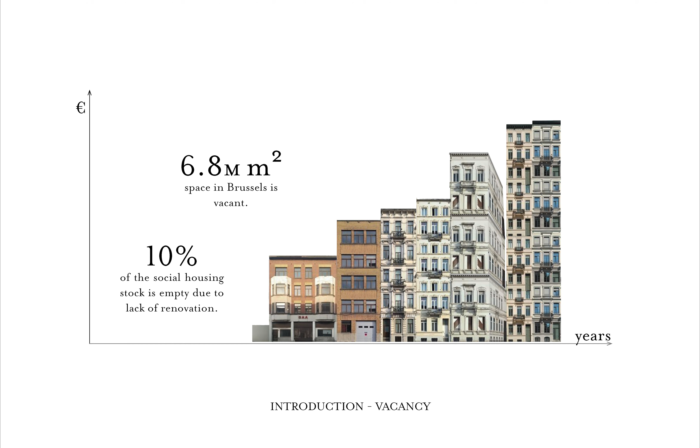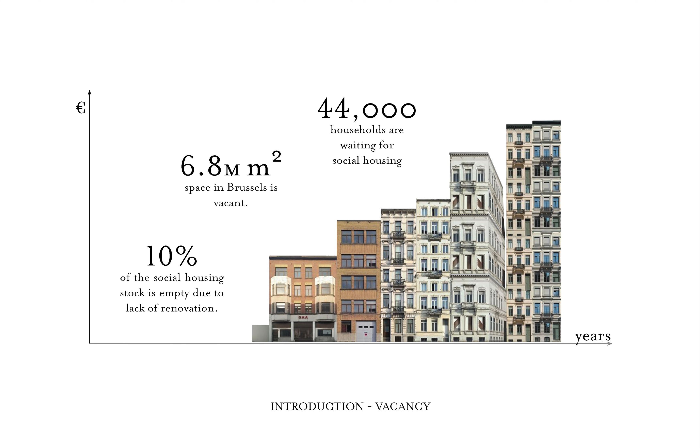Rising rental prices in our contemporary cities make it harder and harder to find rentable place at an affordable price. Controversially, the reason why space is becoming increasingly scarce is not due to the lack of space, but the inaccessibility to it. In Brussels, around 15 to 30,000 of the existing housing units are simply empty because of property speculation.

Vacancy accelerates the decay of the building and increases the feeling of insecurity within its neighborhood. Furthermore, there is a higher chance of vandalism and crime, and eventually it makes our city centers deserted. A temporarily unused property is also a problem for its owner because of the management costs and the vacancy tax.

On the other hand, empty properties are urban resources that offer temporary platforms for alternative usage, triggering entrepreneurship, creativity, allowing experimentation, and is also beneficial for the owner.

To figure out the future use and explore the possibilities that underutilized areas offer, city planners facilitate access to these spaces for the citizens living in the neighborhood, to empower and enable everyone to participate in the construction of the city. To help citizens manage the negotiation process with the owner, non-profit organizations started to emerge.

Such an organization is, for instance, Communa, based in Brussels. Their main goal is to heal the urban scars by temporarily occupying and reconditioning vacant places.

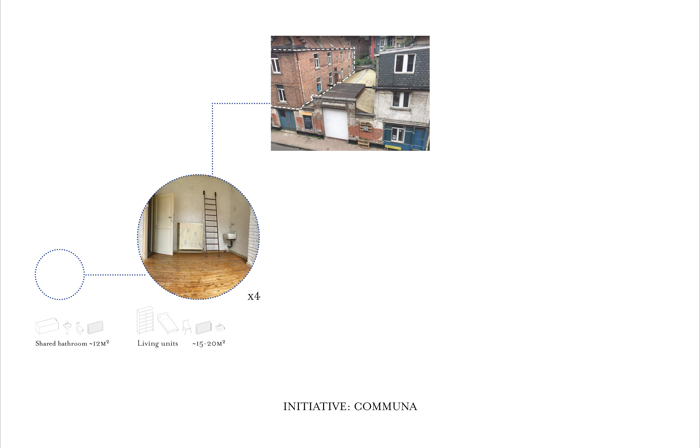This is Lesser, a recently occupied building run by Communa. It contains 4 living units to accommodate vulnerable people, co-working spaces for artists and non-profit social organizations, and a public venue with a community kitchen and bar based on solidarity economy. This is the most important place, which gives home to neighborhood activities, workshops, solidarity and second-hand markets, and cultural activities.

The recovery of the empty places happens as follows. Upon choosing the next possible building that seems appropriate for such an intervention, Communa contacts the owner of the property and convinces them about the benefits of temporary occupation and to let citizens use the property while it remains empty.

They then sign an occupancy contract and Communa co-creates the plans together with the future users. Afterwards, they refurbish the building to meet the minimal demands with the help of volunteers and the committed citizens of the neighborhood, and occupy and maintain the building for the agreed period, which could be 2 to 5 years.

As an organization mainly consisting of young lawyers and social workers, my role and contribution to their operation was a central question for me from the beginning. Throughout our discussions, it became clear that the biggest challenge they face is connected to the notion of constant relocation, because temporariness is not yet fully incorporated into their construction mode.

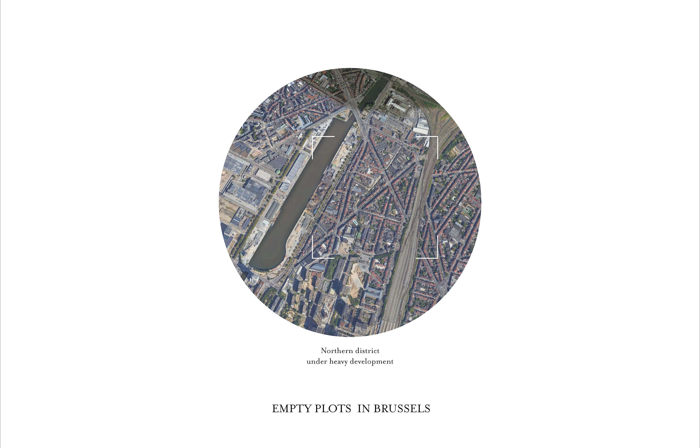Vacancy is an issue affecting all cities. However, I examined an extreme case in the Northern District in Brussels that has been under heavy development in the last 20 years. In the chosen territory, the building sites were unused for 14 years on average, from which 4 sites are still unoccupied to this day.

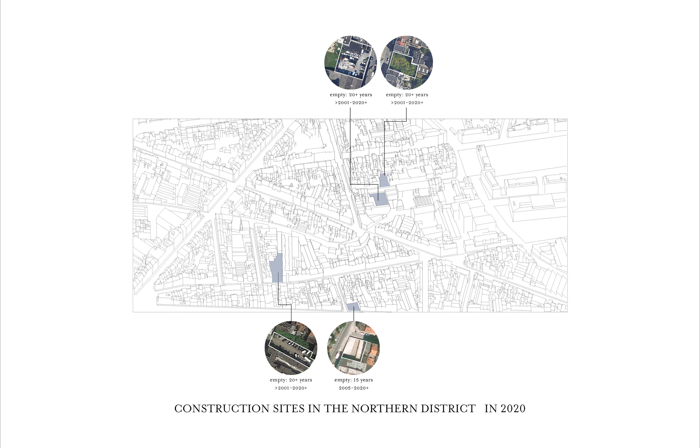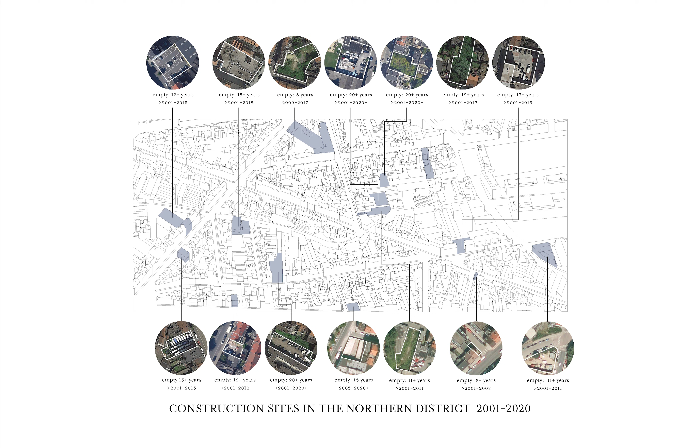During this period, many had some temporary functions, such as parking, but in other cases the plots were simply enclosed from the city, remaining as missed opportunities.

To narrow down my search, I looked at building sites that are owned by the Community Land Trust Brussels, a new player in the city's affordable housing market, who have already collaborated with Communa and would certainly be open for such a socially oriented intervention.

CLT Brussels has many sites where the land acquisition had already happened, but the construction of the homes has not yet started due to its longer-lasting nature. Therefore, these plots can remain empty for many years, sometimes even for a decade, which is a long enough period for a temporary settlement.

The 3 sites they currently own have very similar geometric characteristics: long narrow plots perpendicular to the street with 1 or 2 fairly high firewalls on their longer sides.

Since the design project on the first site is the one that is still in its initial phase, I decided to continue working with this one.

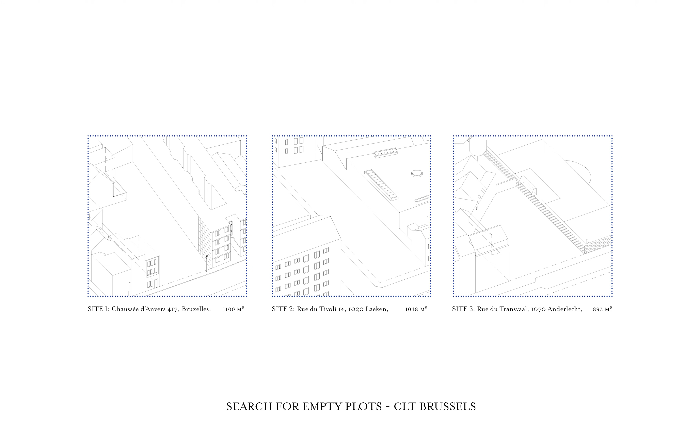The empty plots could be used to house people and families in need of accommodation, or to host community events and provide job opportunities. The framework of the project starts to take shape as we combine the timeline of Communa and CLT Brussels. While CLT is working on the feasibility study, Communa gathers possible future tenants, and together they customize the plans.

Tenants will acquire construction skills in night classes. The construction starts right after the land acquisition. The assembling of the temporary building should not take longer than 1 to 3 months, so even in the worst case scenario there would be a 2-year-long period of tenancy, but preferably 5 years.

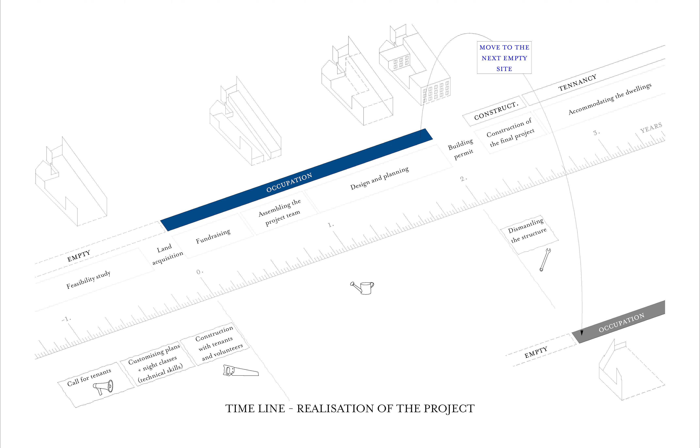These residents could be families from the waiting list of CLT Brussels, disadvantaged students, young adults, couples, single mothers, or homeless people who already live in shelters and need a bit of help to take the next step. The occupation comes to an end just before the construction of the permanent building starts.

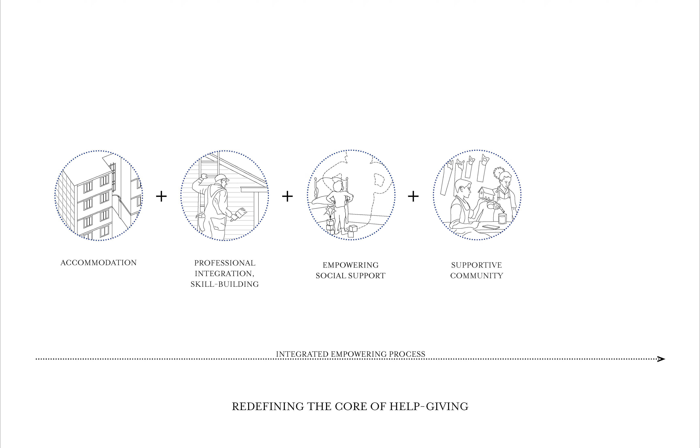The emergency living units don't just wish to offer accommodation, because that alone would not solve the issue connected to precariousness and exclusion. An integrated empowering process is needed, where accommodation is supplemented by social support, professional integration, and skill building, happening within a very open and supportive community, making sure that by the end of the occupation period, residents will be able to move out to a permanent place and integrate back fully into society.

Therefore, residents are fully involved in the design and construction of their temporary homes, which gives them confidence, a sense of ownership, and new skills.

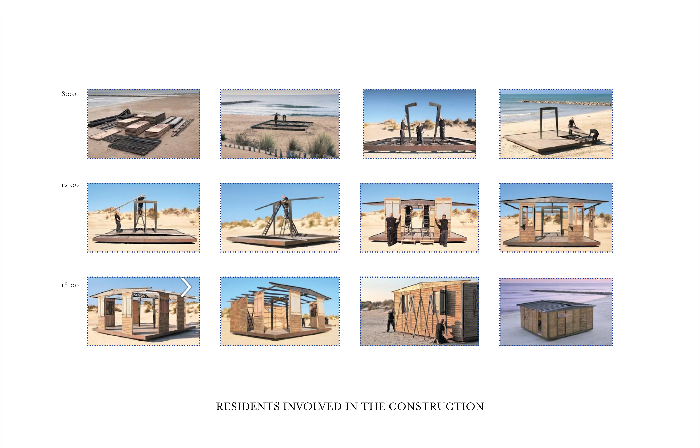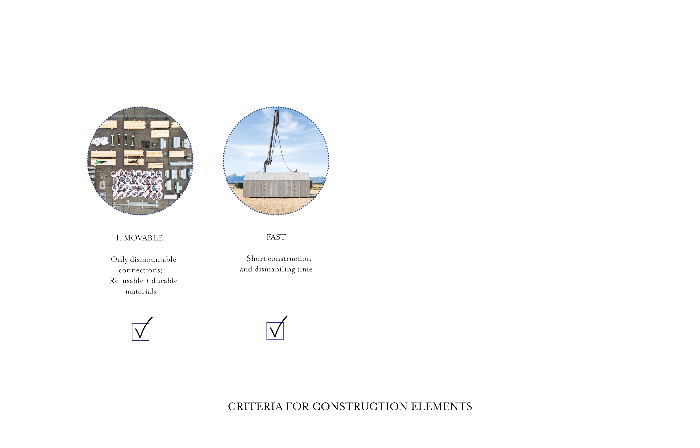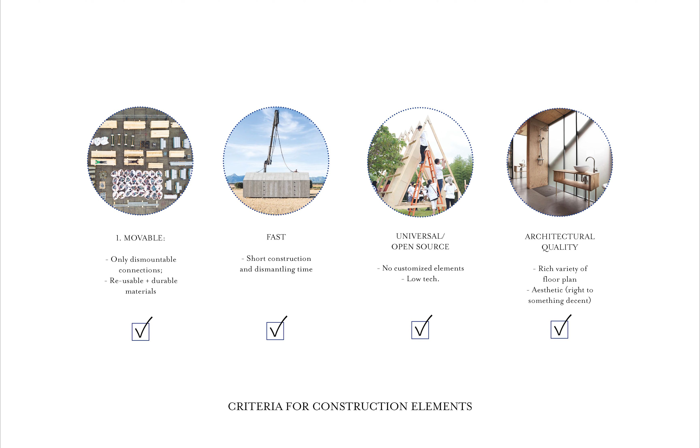To meet these conditions, I collected building components that are durable and have dismountable connections so they could be reused, can be constructed and dismantled within a really short period of time, are low-tech, and the assembly method has an educative community generator aspect. Lastly, it enables a rich variety of floor plans.

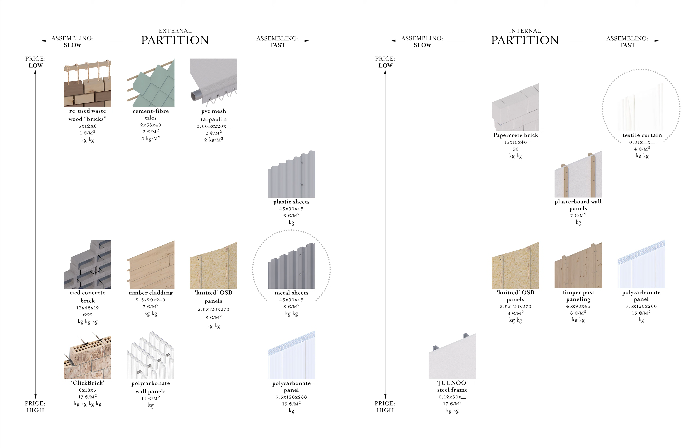Based on these criteria, I assembled a reference building catalog and evaluated the building components based on how fast they are to assemble and how low their material cost is. I made different categories for structure, partition, infill, and foundation. Ideal components are situated along this axis.

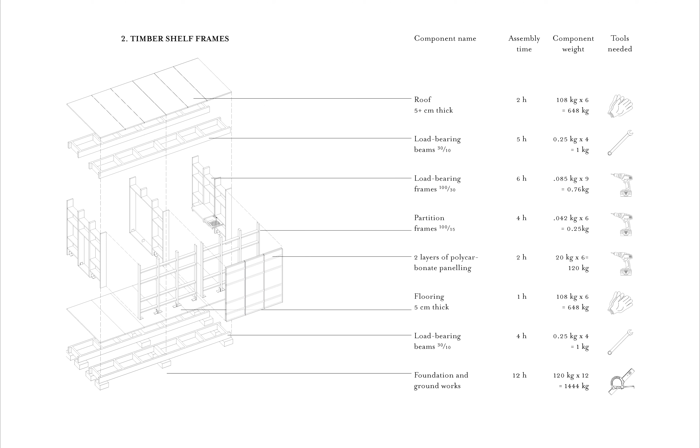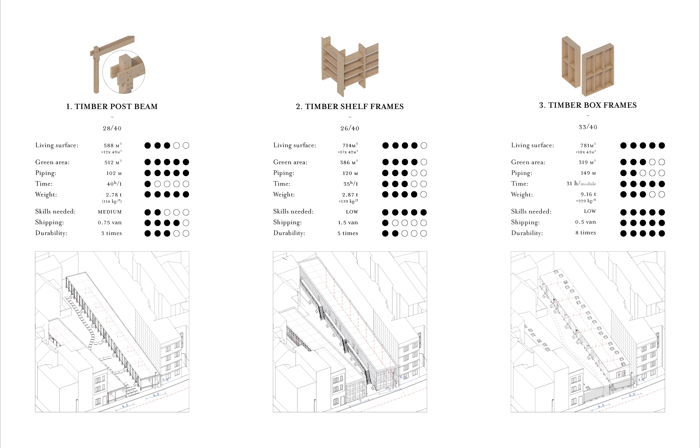Then I chose 3 of the fastest and cheapest components and calculated their weight, price, and time to construct them. After comparing the 3 different possible volumes, the third option, the timber box frame, seemed to be the best solution, so I continued working out the assembly method step by step.

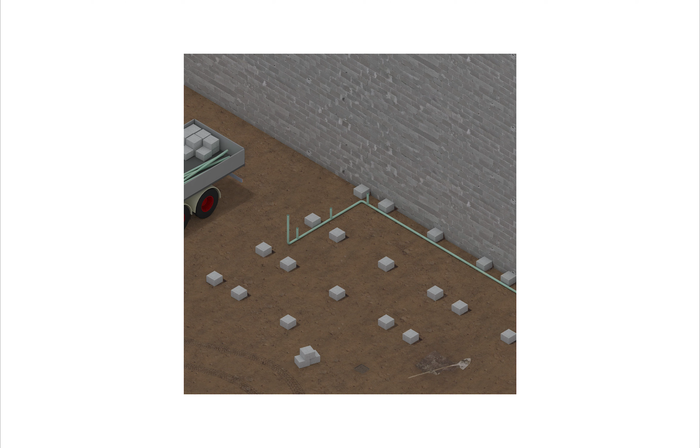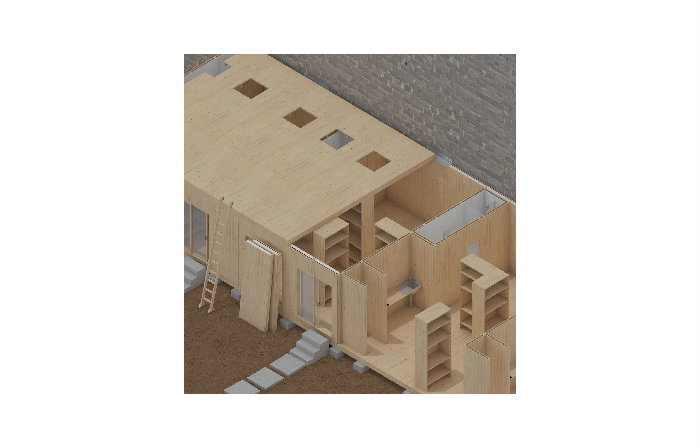The construction started with installing the foundations and the piping, followed by laying the floorboards, lifting the timber frame boxes with a mobile crane, adding the structural partitions, and placing the structural boxes and the cladding with thermal insulation between its layers. The ceiling structure is carried by the firewall and the box frames on the other side. Finally, the skylights and the roof can be placed.

After completion, the residents can move in and personalize the garden and the timber surfaces. The grid is more visible from the top view, showing the rhythm of the structure, where one unit consists of 2 grid elements. The free floor plan is only divided by curtains and shelves.

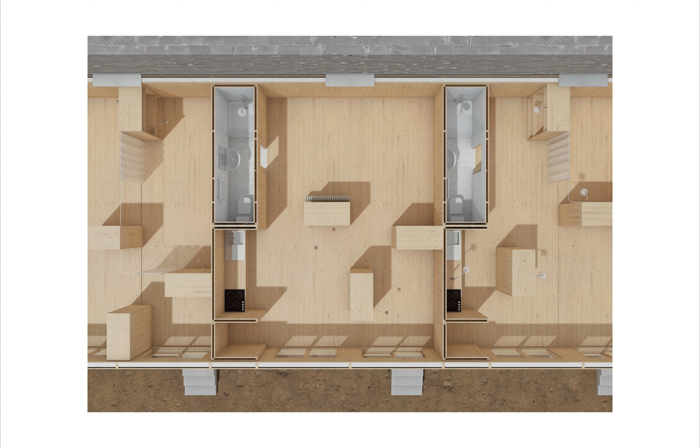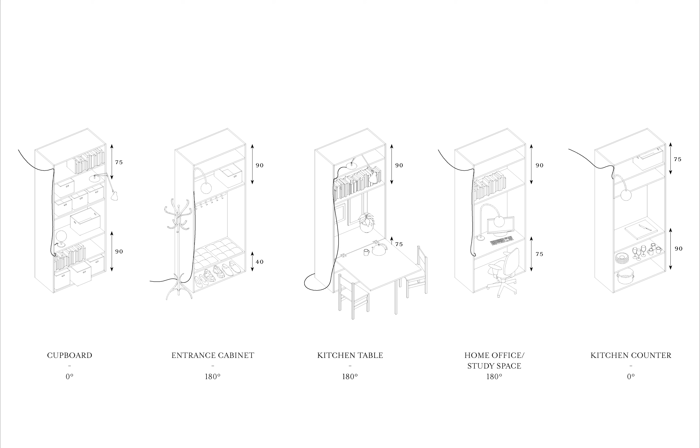There are different floor plan variations for single people or couples, for students, and for bigger families who could occupy 2 units. Shelves can also serve as built-in furniture in case residents don't own certain furniture. This could be of help, for instance, for students or for homeless people.

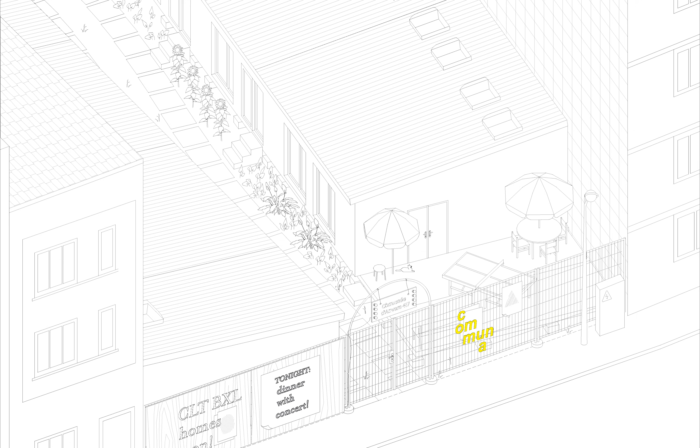The communal space is situated on the street side with a big kitchen, giving home to public events, shared meals, and a washing room. An important element is the fence, which serves as a communication surface about Communa's upcoming events and about future CLT homes. The garden around the home serves as a semi-public space, but is also a productive garden where special absorbent plants are grown to clean possible contaminations from the soil.

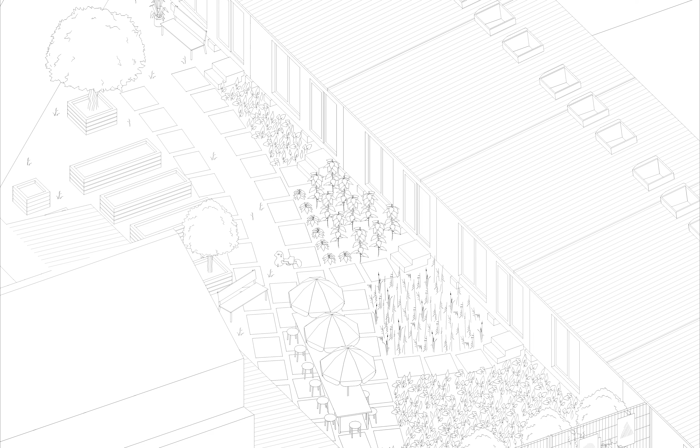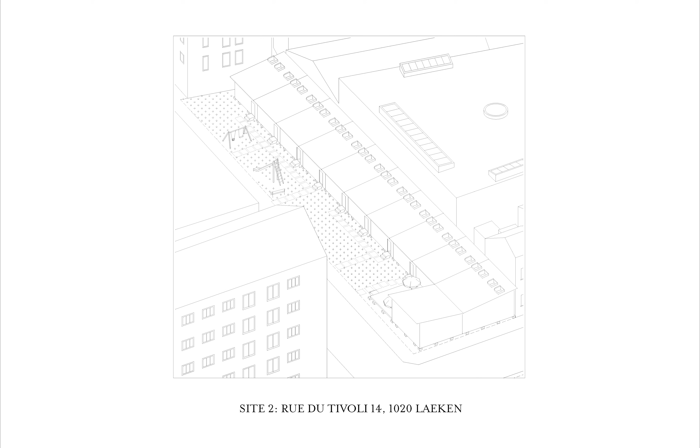Its character changes according to its urban context, while the homes are traveling to different sites. It would be a playground on the site in Laeken, which is in proximity to schools, or an outdoor gym on the site in Anderlecht, which is right next to the soccer field.

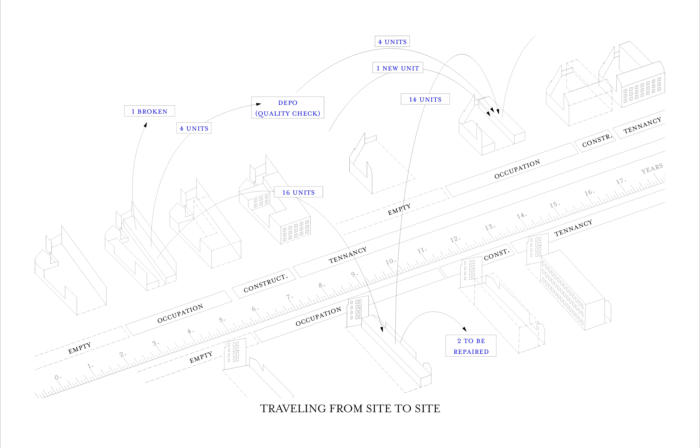Because of this constant relocation and the disassembling of the elements, there needs to be a quality check on a regular basis to correct possible material damages. If the lifespan of a building component comes to an end, elements can be easily changed since the measurements of the building components are synchronized to materials available at building material resellers.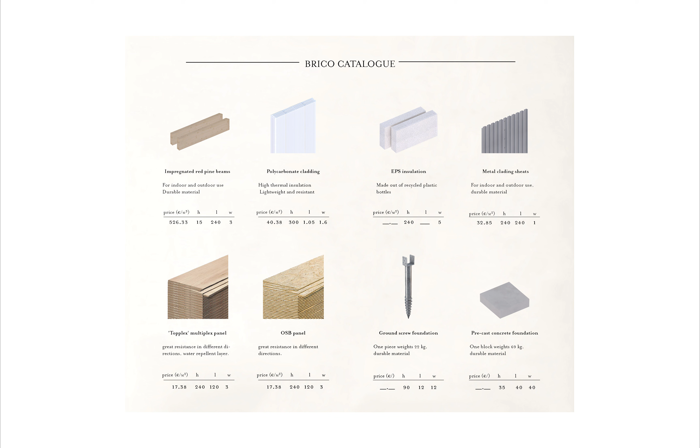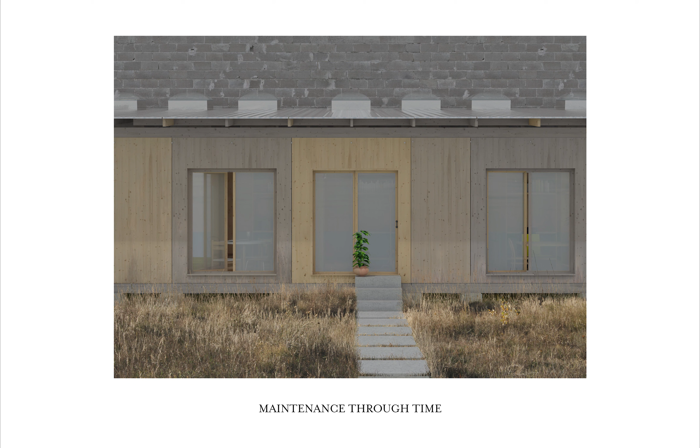While most of the maintenance work has a purely functional aspect, such as replacing missing or broken screws, some changes have a significant impact on the overall aesthetic. The agency of maintenance offers residents the opportunity to add their own personal touch while they are taking care of their environment.

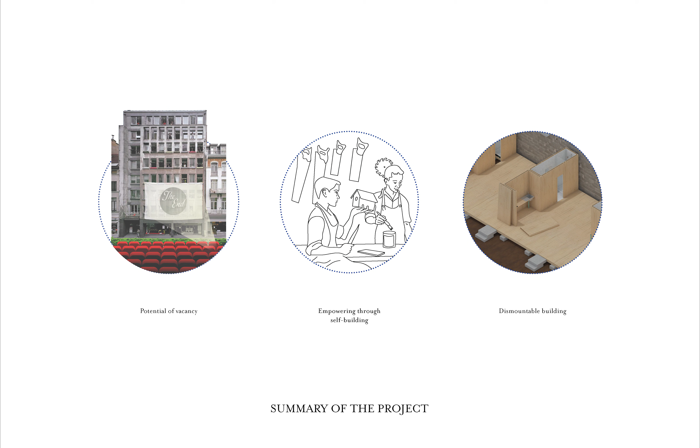My project investigates the potential of vacancy, redefining the core of help-giving through self-building, while saving resources with dismountable building techniques. Thank you for your attention.